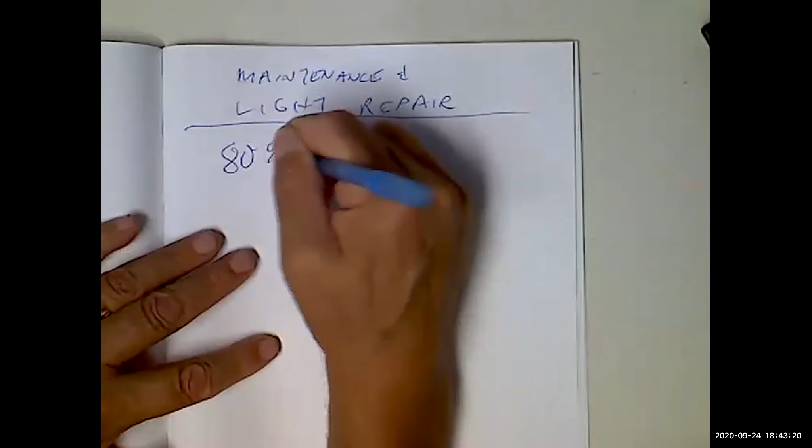Maintenance and light repair—the reason we're focusing on that is because it's 80% of entry level jobs, which primarily have to do with maintenance, keeping things running well, and light repair, changing belts and stuff like that. We're not going to be doing engine swaps, changing out cylinder heads, or putting in new intake valves. The stuff we're going to do is pretty low level, but it turns out low level is most of what needs to be done, and more importantly, it's the most important stuff that needs to be done.

For instance, you buy a used car. Okay, so now you've got a used car. It's a stranger to you. What do you do? Well, the most important thing to do is not buy a fancy stereo, not buy a fancy exhaust, not buy fancy wheels and tires. The most important thing to do is go through that car on a safety inspection.

We're going to put it up in the air. We're going to do an undercar inspection—that means we're going to look underneath it, see if we can find some kind of frame damage, some kind of structural damage. We're going to take the wheels off so we can do brake checks, suspension and steering checks. We're going to open up the hood and inspect the hoses, inspect the radiator cap, inspect the air filter housing—all kinds of stuff that could conceivably grenade this engine if you don't get it right the first time.

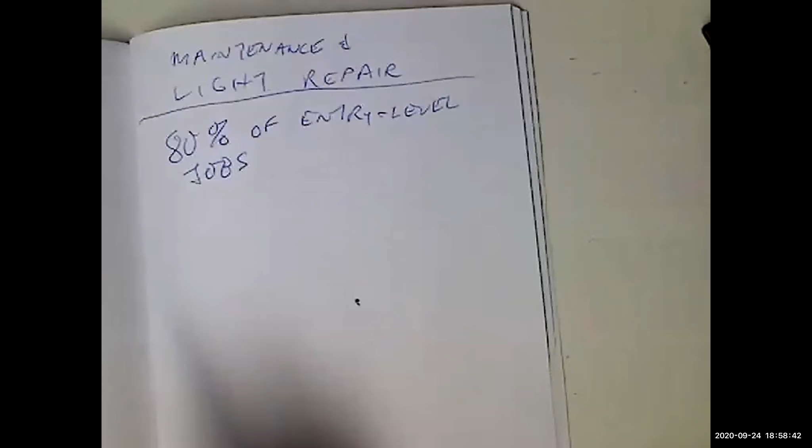Okay, so if you're going to use a scanner, that means you're going to have to learn how to use a scanner. So what do we do? We say, okay, I'm going to make myself a plan of action. I want to check the fluids, I want to check the belts, I want to check the hoses, I want to check the brakes, I want to check the suspension.

And then I can go to Chris Fix and say, okay, this is how you do this, this is how you do that. It's okay to learn how to check the battery when it's some generic battery, but if it's for your particular car, that's way better.

I gotta say, folks, it's true for most of you: nobody expects you to know anything, or not much anyway. But it's always better to know as much as you can, because that way you need less explained to you. The problem is, if the experts in the class are required to explain stuff to you that you could otherwise gather, that takes them off a job that may be really necessary.

Because a lot of times, we'll be in the middle of a process and something really terrible will break, and it's like, okay, there's only a couple of people in this room that can fix this.

And if it doesn't get fixed, either I'm staying there till midnight, which would suck, or this car stays here till next Thursday, which would suck even worse. Or I could maybe have my class fix it the next morning or something like that. There's lots of ways around it, but there's nothing as good as driving in and driving out.

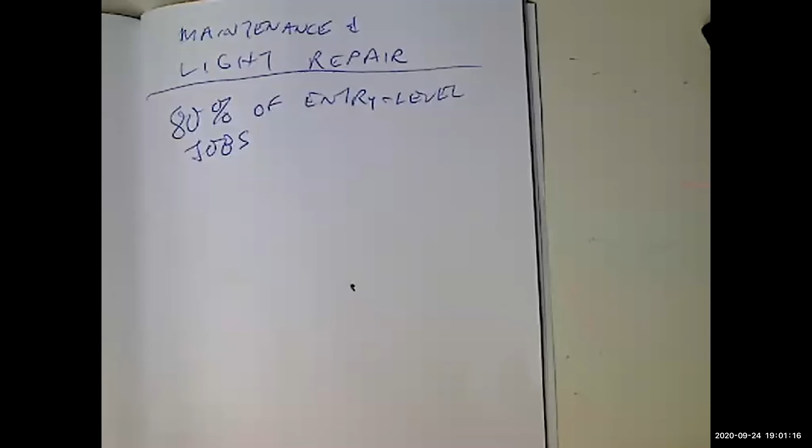Gabe, how's your resume looking? Why don't you send it to me? I'll look it over for you, yeah? Could make a big difference, because now's the time to be moving up. 8% quarterly growth. Gabe, tell me what IBEW says next week, because if you don't talk to IBEW this week, I'm not going to be happy with you. And I'm not talking about making a phone call. I'm talking about getting your little booty down there and talking to somebody, because if there's 8% growth, then the unions have got to be feeling it too. Go get some, dude. Get some.

Gabe, my question to you, and you don't have to answer this because it's kind of a private question, but do you have a retirement at the place where you work? The reason I bring this up is because many of these private companies wait until about a year before you're supposed to retire, and they just fire you, so they don't have to pay you retirement. I've seen that a dozen times. At least the union won't do that to you, hopefully, theoretically. Maybe I'm fooling myself. In fact, it looks like they may even be offering people like me golden handshakes. That's the rumor. That's the question.

Which is good because that'll give Chuck the opportunity to take my job. Chuck wants my job. Ever since I met Chuck Reyna, I knew he wanted to take my job.

You may get your chance, buddy. You may get your chance. You can't beat the pay, and well, you can probably beat the working conditions, but I do have air conditioning in the shop. Did I mention we have air conditioning in the shop? No extra charge. Or did I mention we have air conditioning in the shop and it's $20 a night? Yeah, we have air conditioning in the shop.

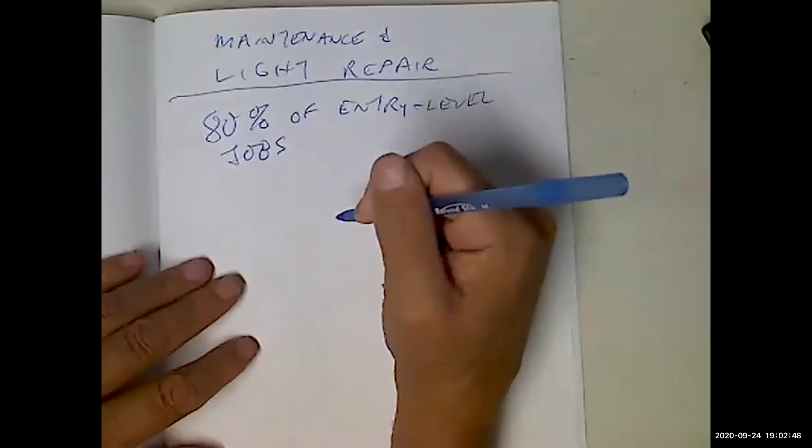Probably won't need it by the time we get there, but anyways, so maintenance and light repair. Light repair means we don't do major surgery, but we do brake jobs and such. We have done struts. It's ended badly a lot of times because that ends up being like a 3 or 4 hour job unless me, Chuck, or Rudy does it in general. Hopefully we'll find out about other people and what skills they have.

So just so you know, we aren't going to do engine rebuilds. We're not going to be changing head gaskets or anything like that, but we can do stuff - change light bulbs, change radiators, whatever. We can do a lot of stuff as long as you understand that you need to do your part before class begins.

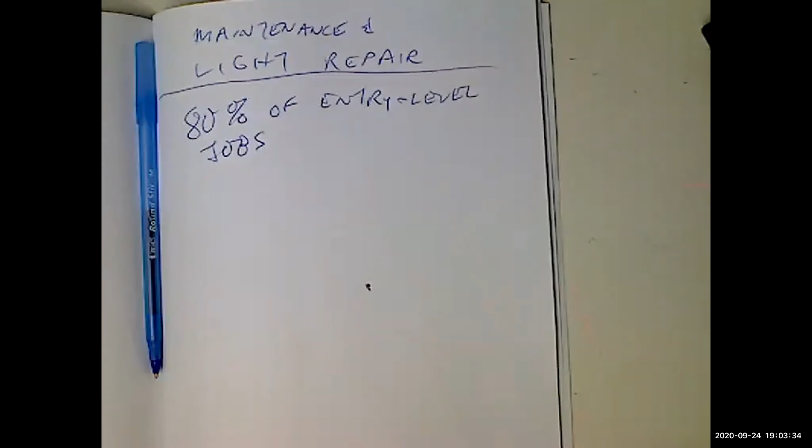Incidentally, I'm going to have an ROP right before this class that's going to go from 2:15 to 5:45. Now, technically, we're not supposed to let you in the gate before 6, which would suck because that means we couldn't even get started on any cars before 6. So in general, I like to get the gate open at about 5:30, so people can start trailing in. They are not going to enjoy the mingling of adults and children, so let's not overdo it or create an issue, but it's always better to have more time than less. It's always better to be done an hour early than 10 minutes late.

All kinds of stuff we're talking about today. All right, so what do we need to know?

Well, we can talk about fluids. Let's talk about fluids. Hard to talk about fluids without talking about the systems they work in. Well, let's talk about brakes. Might as well break the ice. Brakes gotta slow or stop the vehicle.

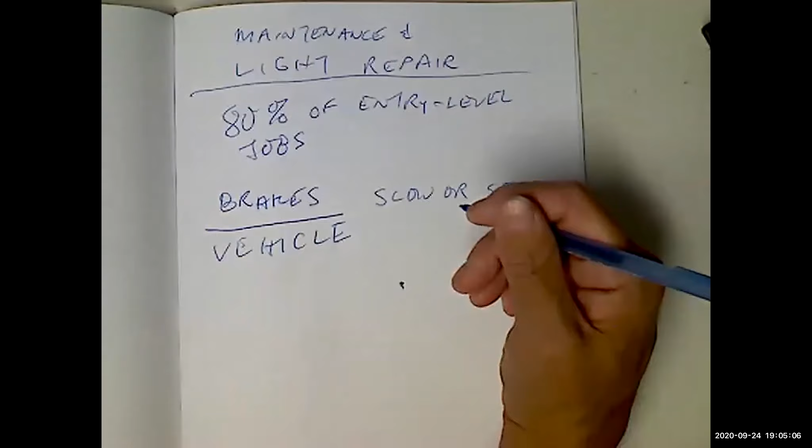And what chapter in the book is this going to be? I was just looking at it here. 15? Now, to answer your question, the book is not truly aligned with what we do in this class, but what we do in this class is kind of. It's page 181, I think. Chapter 15. Correct.

Okay, so the book is not truly aligned with what we're doing in this class, but what we're doing in this class is actually this book right here, except this is like a $110 book. And I thought that that would be prohibitive for most people, especially since they're not planning on becoming technicians. Now, if you were taking this class at Citrus or something like that, this would be the primo book.

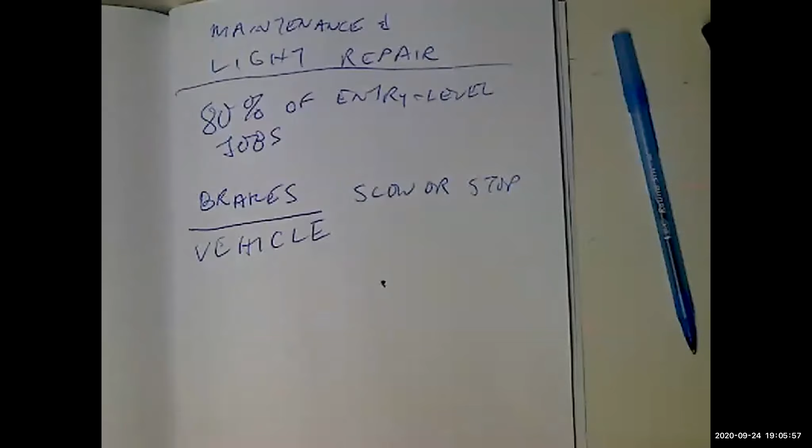It's kind of too hardcore for what we're trying to accomplish. So what I didn't want to do is box people out by having a textbook that was too expensive, because if we make the textbook too expensive, then people just won't buy any book. And I thought that auto upkeep was much better than no book, and probably for most people better than this. However, if you really want to learn this stuff, if you're really hardcore about it, you might want to consider buying this book or the other book.

Now, let me ask you a question. Does it matter if you get an old edition? No. In fact, I would suggest it because the old editions are going to be cheap. This is 2014. Unfortunately, this is a relatively new program, so you're going to have a hard time finding old versions of this book. But maybe you can find one with a damaged cover or something like that. I don't know. But let's go on.

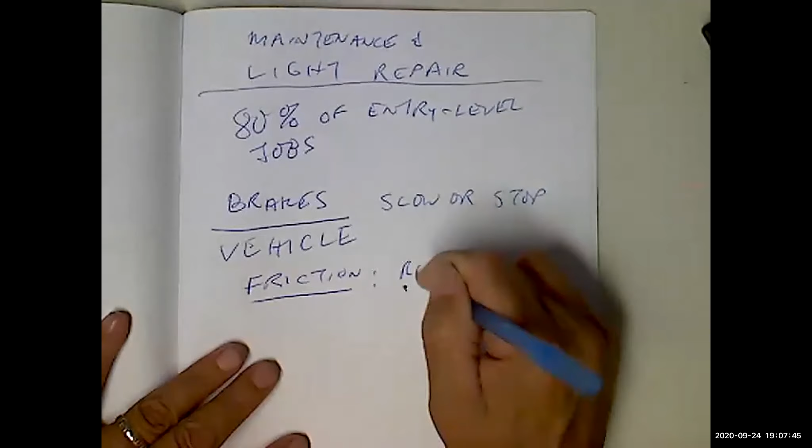All right, brakes are going to slow or stop the vehicle. How? They're going to do it by friction. And friction is defined as resistance of two things moving across each other.

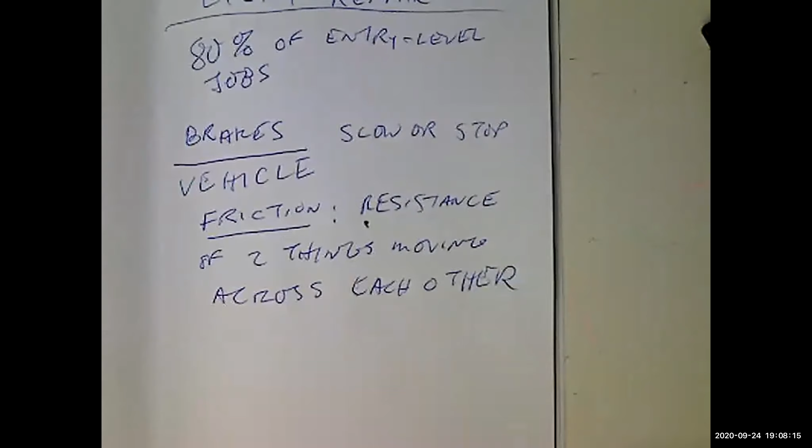So for instance, if you had ice moving across glass, that would be low friction. If you had skin moving across asphalt, that would be high friction. Well, the important part about that is friction creates heat. Yep, heat.

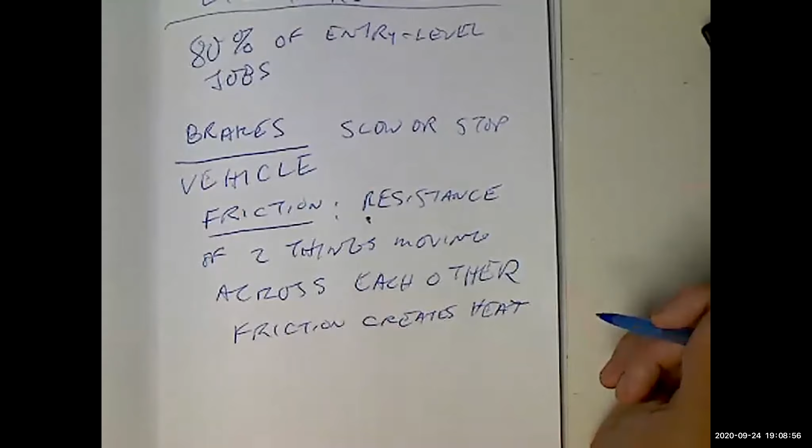And that's a big deal because heat is the enemy. Heat is the enemy in a whole lot of ways. And one of the ways is the fluid, right? Because if you get water in the brake fluid and it gets hot, guess what happens to it? It turns into steam. Now all of a sudden you lose your solid pedal. That's called spongy pedal when hot. And that's a sign that you got water in your brake fluid. Change your brake fluid. Usually you're not going to discover you have that problem until you really, really need it. Yeah, until you really, really wish you didn't have it.

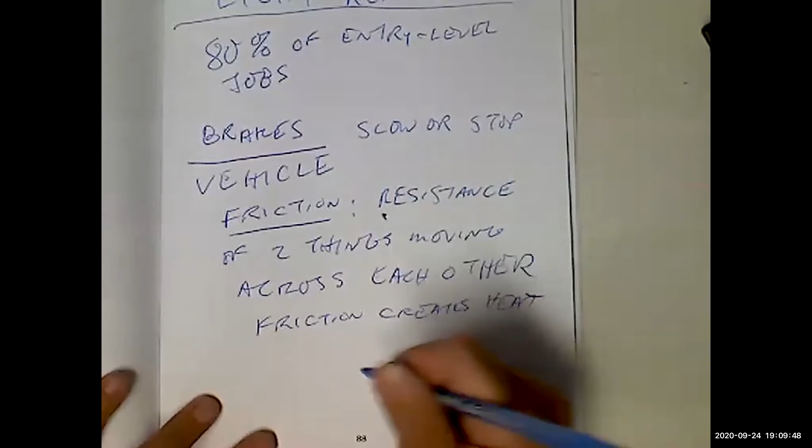So. Or you go over a hill. Yeah, exactly. I was going to the US Festival in 1983 when it was the only time I've ever experienced brake fade. My 65 Malibu. We're going to the US Festival in 1983 and I come down that hill in Devore and it's like I step on the brakes going around the corner and it's like, fellas. Hey, fellers. Put your feet up. Yeah, might as well tighten them seatbelts. US Festival. Yeah, there you go. Was that the first time? Oh, sorry. First time I went to the US Festival? No, was that the first US Festival? Yeah. The first US Festival. 83, 84? Yeah. Oh, you too? Man. You too? Yeah. Right? Yeah. And how would you know? I do. Your grandpa tell you about that? No, I've been into music for a long time, since I was a little kid.

Anyway, so the point I was trying to make was we're going to make friction, and we're going to make friction by using friction materials. And that's what we need to focus on this evening.

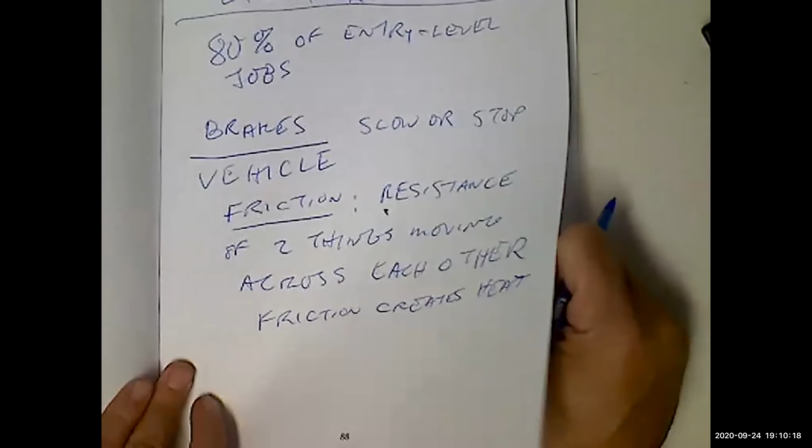There's two main types of brakes. That would be drum brakes and disc brakes. I'm going to teach you disc brakes just because it's kind of quick.

And I think what I'm going to do, well, let me get to that in a moment. So here's what I'm going to do. This is a top view, which means I'm looking down from the top at this. And, doggone it, I'm going to have this little thing here, going in this little thing here. Can't do it this way. Can't do it this way. It's too abstract, people aren't going to understand it. So let me do this, and I'll be right there.

Well, that's a caliper. That, and that's not what I need. What I need is...

There we go. Okay, this is the disc brake assembly, and it's called the disc brake assembly. Frenos de disco. It's called the disc brake assembly because this is called the brake disc, often called the rotor.

Now, the rotor spins. This setup has been used in aircraft since the 30s. The reason it works so well is because if the rotor gets wet, centrifugal force will throw the water off. Plus, the brake pads here will actually wipe the water off. See, if you get water inside drum brakes, it'll just get trapped inside the drum and you'll lose friction, which means it won't stop as well.

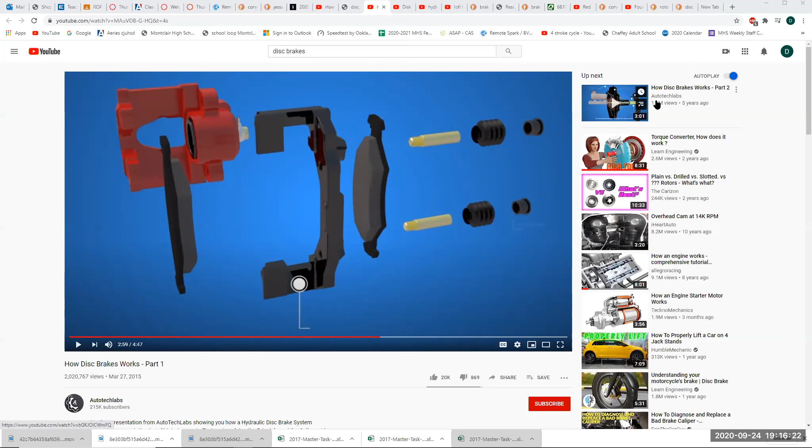Okay, so the name of this video is How Disc Brakes Work, Part 1. Part 2 is going to show you how the master cylinder works and how the power booster works. So this can be your homework.

But let me show you, because it's going to be impossible to explain if I don't show you at least something. Pascal's law says that in a closed container, pressure is the same everywhere and in all directions. That's the basic principle of hydraulics. That means we can create a pressure in a closed system at the master cylinder, and that pressure will be transmitted to each of the brakes.

I hope so badly that we have high school football. I can't even begin to tell you.

And there's a demonstration, right? We're pushing down on this liquid, and the pressure is going to be the same everywhere and in all directions.

Over here, keep it simple. We can see basically a syringe, and we can see that if we push down this plunger, the fluid will be forced to come over here, and it'll push this piston up. Well, this is like the master cylinder. This is like the caliper piston.

When we create pressure by stepping on the brake pedal, it's going to create fluid pressure that's transmitted to the calipers, which is going to push the piston this way, which is going to squeeze the brake material against the rotor and slow it down or stop it.

I will probably give you a better example really quick. But I just wanted to show you a bunch of mathematical formulas which we will find interesting, but I'm not going to do them.

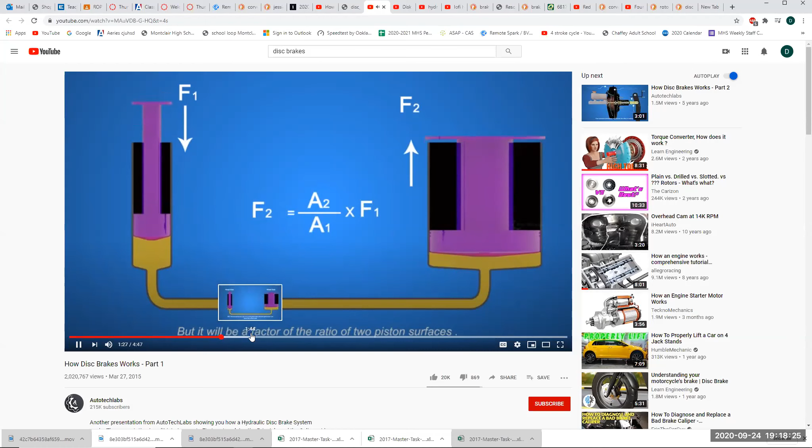This concludes seeing how this works. All I'm going to do is show you the general principle, and then I'm going to show you how it looks on the car.

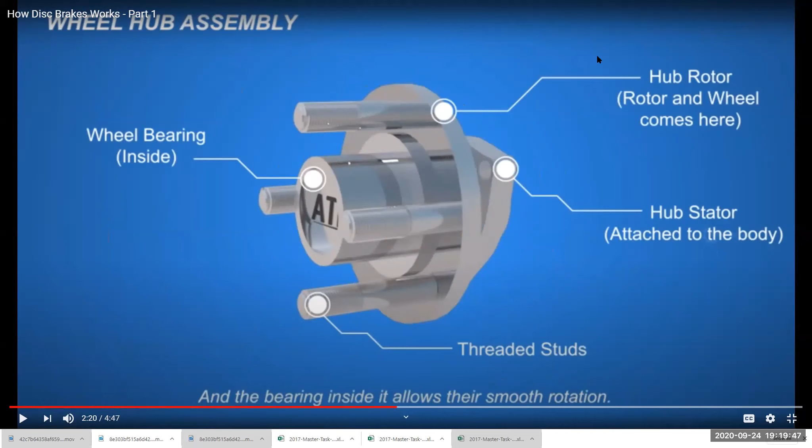The wheel hub assembly holds the wheel and the disc rotor, and the bearing inside it allows their smooth rotation. Every bearing allows a shaft to rotate in a housing, or something to rotate on a shaft.

The disc rotor is the part to which the brake pads squeeze against. This creates friction that retards the rotation of the wheel. The disc rotor produces a lot of heat due to this friction, and the drilled holes provide ventilation to remove this heat.

The brake caliper assembly uses the hydraulic force from the brake pedal to squeeze the brake pads to the rotor surfaces, thus creating friction and decelerating the wheel. That right there is the caliper, that's where the brake line attaches to. The black thing is the piston, which pushes out of the caliper and squeezes the brake pads against the rotor. And that's the brake pad here and the brake pad here.

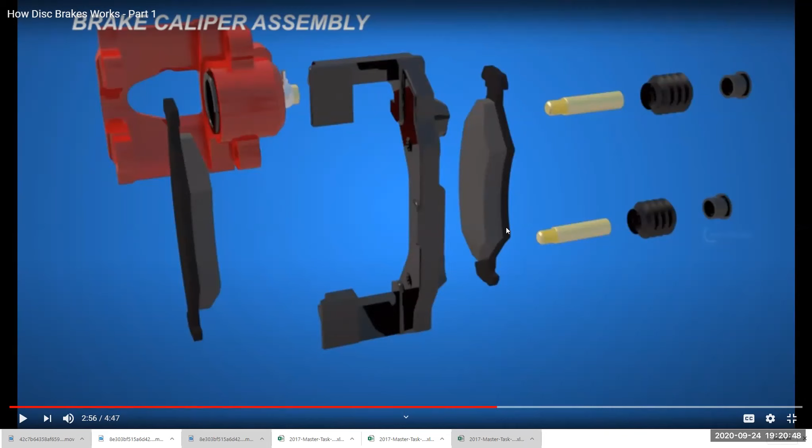As you can see, it's got the black steel backing plate and the gray brake linings, which does the actual friction work. The caliper assembly consists of the caliper bracket, slider pins, dust boots, inner brake pad, outer brake pad, caliper frame, and inside it, the piston.

The caliper frame has a banjo fitting through which the fluid reaches the piston. The pressurized fluid from the pedal's side is capable of pushing the piston with great force. Also, the caliper frame is free to slide along the slider pins within a fixed extent.

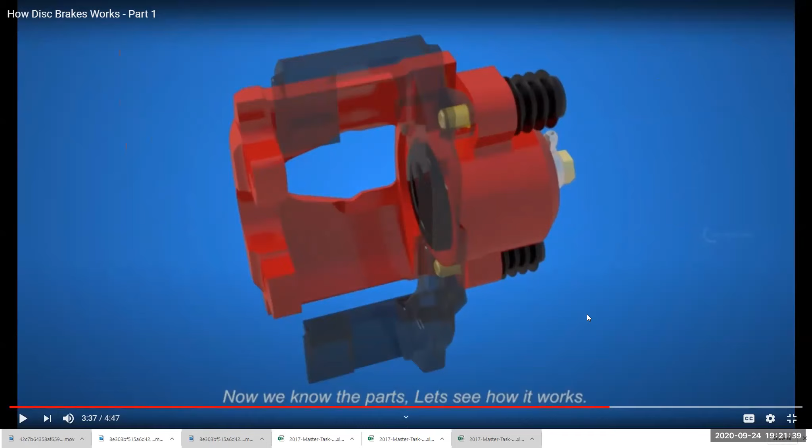Now we know that's the part that's bolted to the spindle, if you remember our lessons from earlier. Let's see how it works.

When you apply the brake, the caliper will receive the high-pressure hydraulic fluid from the brake master cylinder. The fluid will push the piston, which makes the inner brake pad squeeze against the disc rotor surface. As a result, the fluid's backward force will push the caliper frame along the slide pin, which makes the outer brake pad squeeze against the other side of the disc rotor.

Let's see one more time from the top view. This is the drawing I was just trying to make, but I figured you wouldn't understand it unless you saw this illustration. That's the rotor, and it's spinning. This right here is the caliper. Inside the caliper is the piston. There's the brake line right there.

Inner brake pad, friction material facing towards the rotor. Outer brake pad, friction material facing towards the rotor. Right here is the caliper, made of cast iron, sometimes aluminum, and it's got the piston inside. And then it's got these sliders, which allow it to move in order to clamp correctly.

Watch: the fluid pushes the piston, and the piston pushes the inner brake pad. Once the inner brake pad is pushed against the rotor, the fluid will push the caliper frame. The outer brake pad will now be pulled towards the other side of the disc rotor. This is how the disc brake system works on the wheel side.

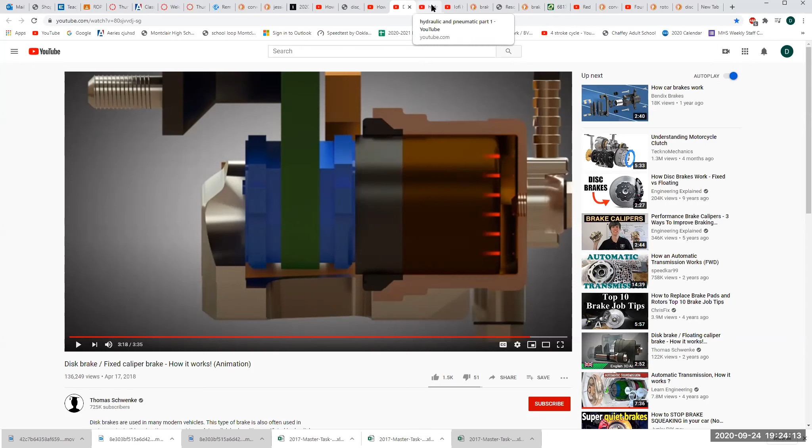Hydraulic and pneumatic, part one. Hydraulic means liquid, pneumatic means air, like pneumonia. For instance, on all the vehicles we work on, they're going to have hydraulic brakes. But when you start doing heavy equipment trucks, they're going to have air brakes. Same principles, just different applications.

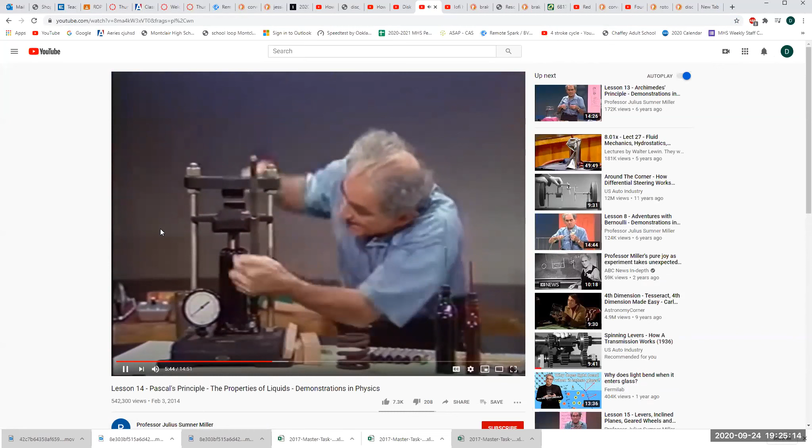He's not trying to act like a freak, he actually is this way. But you know what, he's cool, he likes the way he is. I mean, this is like my kind of people, right? He's an interesting guy, he likes the way he is. Most people would look at him and say, dude, you're a freak. But this guy is interesting. He made these videos like 60 years ago and people are still watching them. Professor Julius Sumner Miller—he's probably been dead 40 years, but you know what, if he likes himself, then... and here is a block of wood... most people don't. You can learn a lot from these videos, I'll tell you. He's an interesting guy, and he's come up with a bunch of interesting ways of explaining stuff. Maybe that could help you. You know, I think he's funny and cool.

So that's what I would suggest on that. I go to here, and then I come back here. So that's the videos I would like you to watch. I mean, we just don't have that luxury. I kind of feel like not making this drawing now because you've already seen the animation, and I don't think we're going to have time. Well, let me just skip that. Let me just burn that page then. The more I think about it, the less time we have. But...

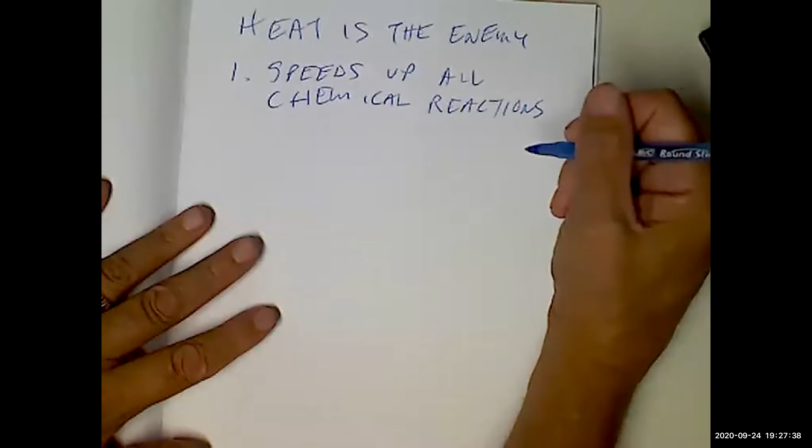You ever seen the picture of the face of those truck drivers that drive around with their window down? It's like this side of their face looks like they're 80 and this side shows that they're only 40. It's because heat increases the speed of all chemical reactions. That's why, for instance, that's why we wash our hands in warm water.

I mean, your bread would eventually rise, but if you put it in the oven, it's going to rise a lot faster.

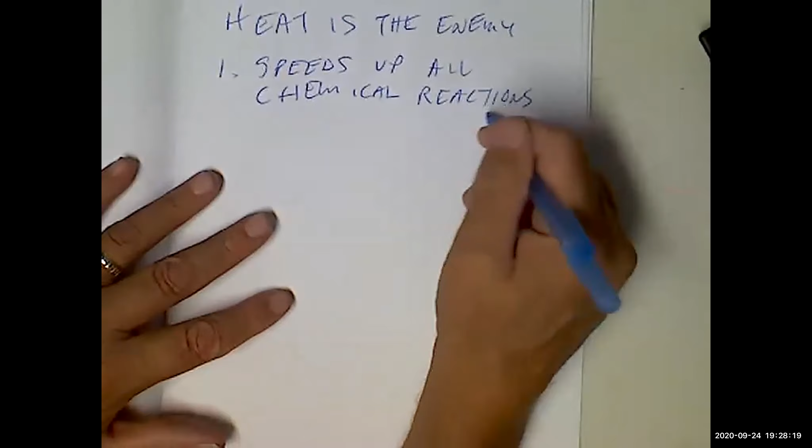Anyways, the point I was trying to make was it speeds up all chemical reactions, including oxidation reactions like corrosion and rust.

If you increase the temperature of iron and water, it will increase rust. Brakes get hot because of friction, and we've got a whole bunch of things to deal with when it comes to getting rid of this heat. It's going to increase the speed of breakdown of lubricants.

So if your engine runs hotter, you're going to have to change your oil more frequently. If your engine gets hotter, your coolant's going to break down more quickly. If your battery gets hotter, your electrolyte's going to break down more quickly, and so are your battery plates. Heat is the freaking enemy, and as a result, we've got to worry about that. It speeds up all chemical reactions. That's one big problem we have. For instance, it's going to make all the rubber die, because the two main enemies of rubber are heat and oil.

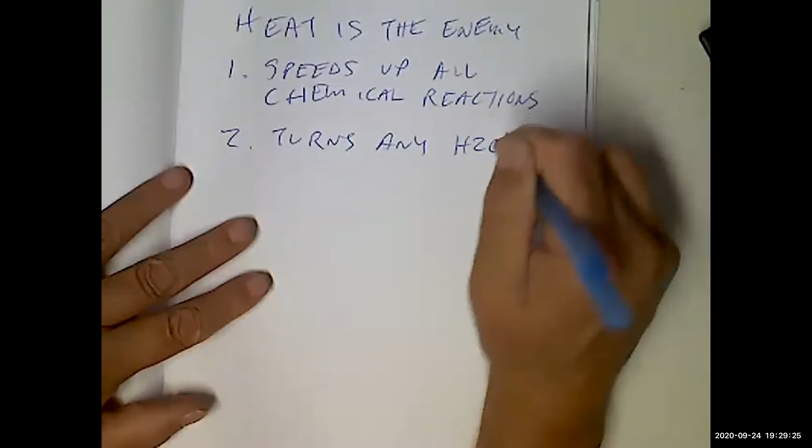Number two, heat turns any H2O, which is a liquid water when it's cold, into a gas, I'm sorry, into steam. Which means if we have any water in our brake fluid, it's going to turn into a gas. And when it turns into a gas, we have no more hard pedal.

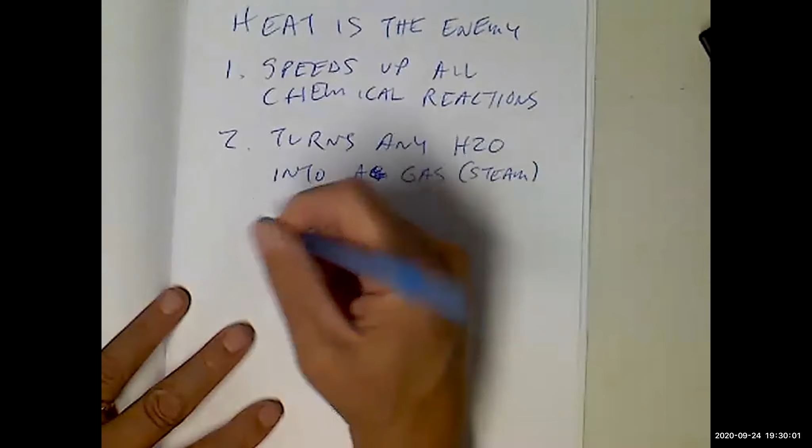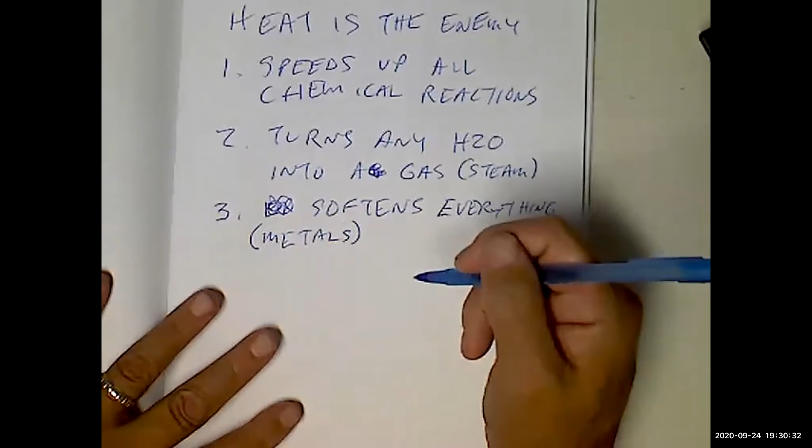So heat is the big enemy. It's a management thing. It softens everything. In this case, we're mostly concerned with metals - they're soft, so they're not that strong. It's like butter: you get it hotter, it turns into a liquid. Everything liquefies.

All right, so as a result, heat management is the key. That's why, when we see drilled rotors, we're trying to get all that airflow. If you look at Corvettes and stuff like that, you'll notice they actually have functional brake ducts, which are continuously blowing air on the calipers and rotors, trying to keep them cool, because you don't want brakes to overheat. If you watch that movie Ford versus Ferrari, you saw that was a major part of the plot.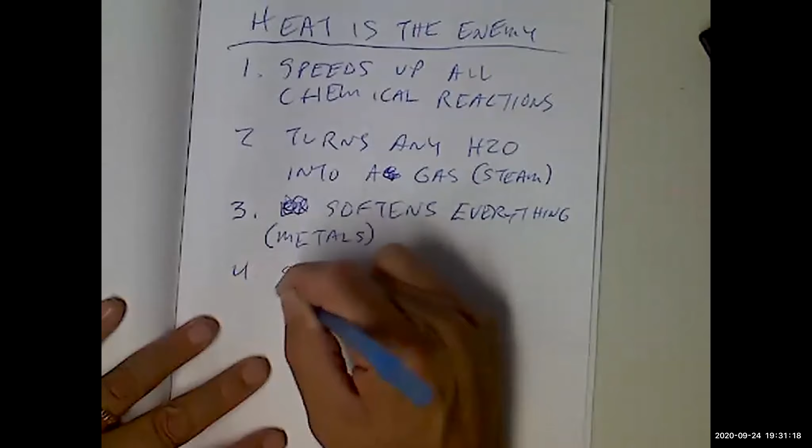And of course, speeds, fluid, and lubrication breakdown. Which is why when you're bleeding brakes, you're always going to find out that the dirtiest, rustiest brake fluid is always right next to the brake pads, because that's where it's the hottest.

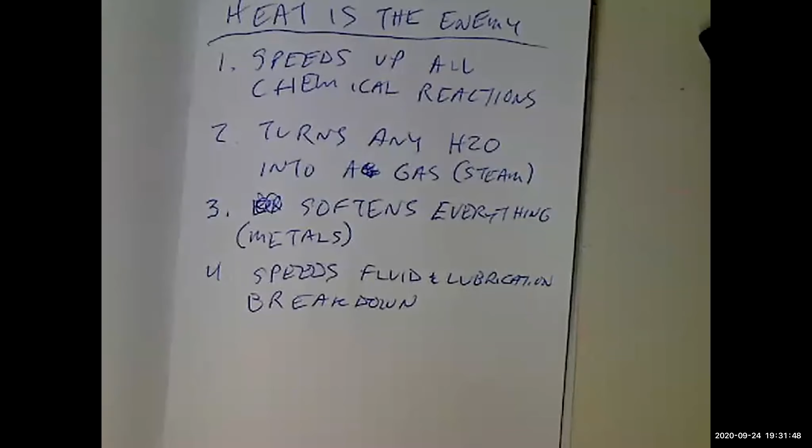In fact, when you have disc brakes on the front, you have to use special wheel bearing grease so it doesn't just liquefy - front disc wheel bearing grease. You have to use a special formulation of grease, otherwise it just liquefies. Incidentally, while we're on this topic, just as an aside, you don't want to mix different types of grease because they tend to liquefy. So if you're going to add grease or something like that, you really need to clean out all the old stuff and then put in fresh, which is a drag because it's like a million times more work, but it's true.

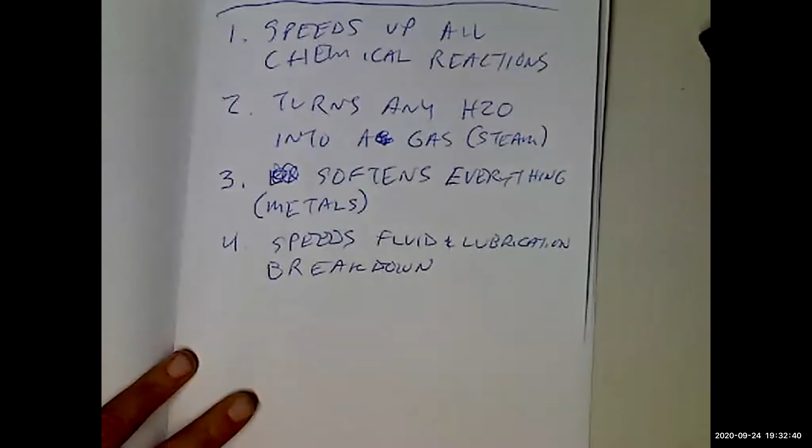Radcliffe, I have a question. Yeah, please. So I actually just scanned my car today, and it popped this one up, which is something we're actually talking about. I can't see it, let me shut down and move some stuff. I'm still learning how to use Zoom.

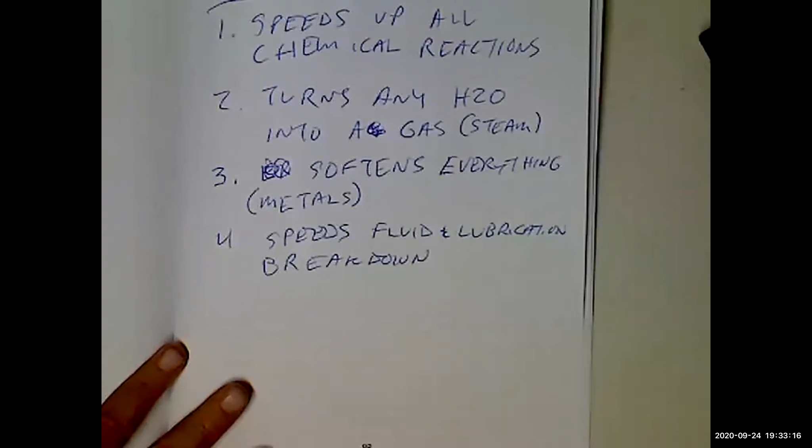What number is that? It's B0013. It was one of the brake things you were talking about. B0013, yes. Can I see the description again, please? It says passenger knee bolster deployment control, subfault, unsafe to drive. That's an airbag? Knee bolster? What in the world?

I'm not too sure. Did you look it up on the internet? I did actually, and it said something about my brakes. All right, well, okay, we got 12 minutes. Let's look.

You said B0013? Yeah. Driver frontal deployment loop stage 2. What in the world? What kind of car is that? It's a Ford Escort, a ZX2, 2003. Did you just buy this car? I did, the beginning of the year, around February. So I've had it for about a good minute by now.

Okay, did you go to Mitchell Pro Demand and look to see if this is a recall? I did not. Okay, it says right front passenger frontal deployment loop circuit. Well, that's helpful. Is this a salvage title? No, it's not, it's only ever had one owner, he bought it off the lot. He was in his 80s, said he couldn't drive anymore, so he sold it to me. So you didn't look it up on Pro Demand? I did not.

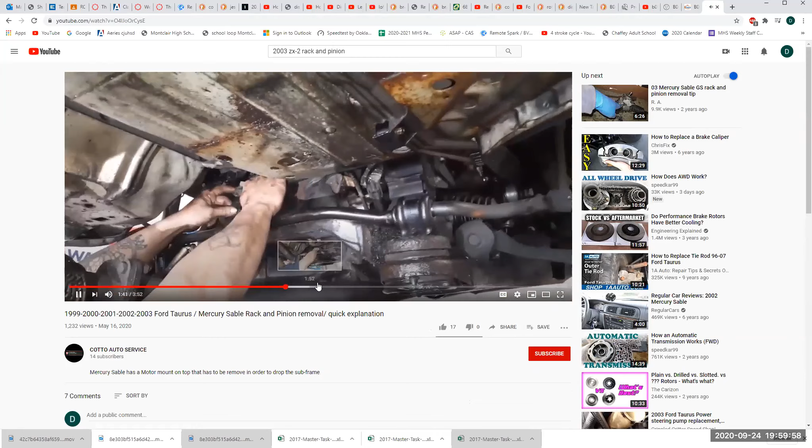Searching online: get your transmission jack or something. The rack and pinion is going to be up here. You got 2 screws, okay. You got to take off all your sensors - you got like 3 plugs, 3 sensors, 3 over here, 1 over here. So it's actually 4. This is the O2.

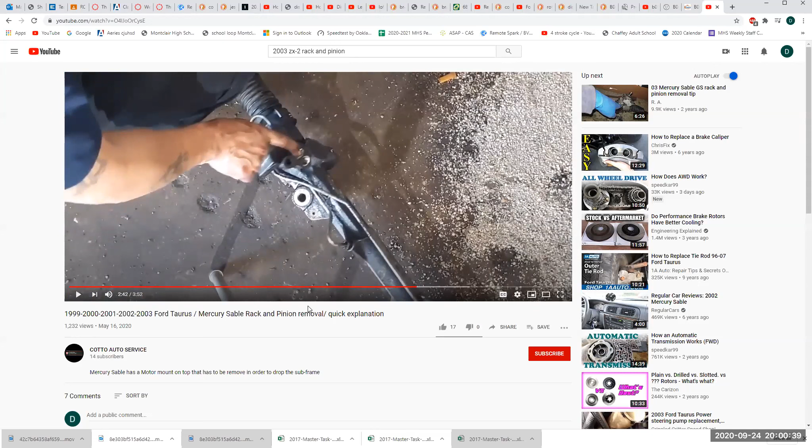Now if you put this rack and pinion in, the steering wheel is not level, or the rack and pinion is not right in the middle of its travel, could be a problem. The whole thing just came down with no issue. As you can see, you got all the clearance, all the space, everything in the world. You got to work with 1 hose, the left one, which is the main first stuff.

Yeah, he's got all this copyrighted information. Anyways, the point I was trying to make was, I think this is way past our pay grade. Although I do see - I don't know if this Mercury Sable is the same thing, but I'll bet you it isn't because the ZX2 is kind of a high performance version. So the fact that when I look around, I don't see any service information on how to do this, and I also don't see any people making videos about it.

Oh, you know what we could do is we can come here to Pro Demand and let's just go rack and pinion.

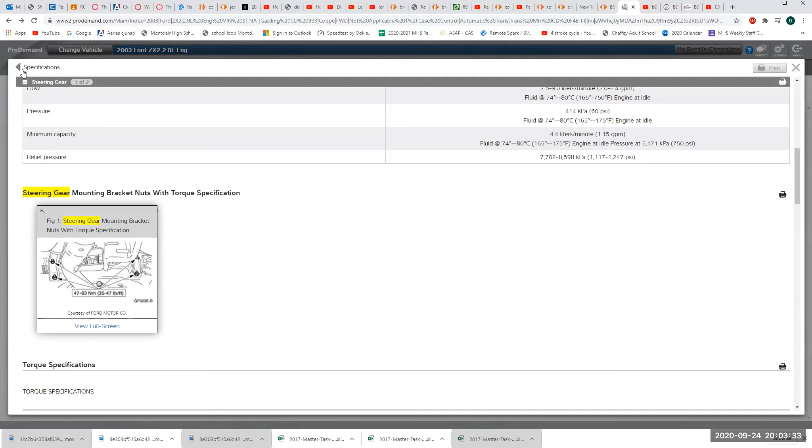That's not going to tell us anything. All right, unfortunately, I don't think we can spend too much more time on this. Torque specifications. Well, it doesn't show anything horrifying yet. Replace.

Fixes, component operation, OEM testing, top repairs. Replace steering gear, that's the top repair. Real fixes, clunky noise heard. Yeah, I don't know, I don't think we can spend too much more time on this.

But that's the problem, because if you take it to an underqualified technician, they're just going to run you around the rosy. Yeah, shoot. Component operation, then we're done right there. Nah, nothing. Shoot. Okay, all right, sorry about that. Let's get back at this.

Like I said, what I would do is, okay, the airbag thing, I think they disconnected a sensor and didn't reconnect it, I suspect. Because when I look at this right there, oh, shoot, sorry. I did email you the other codes that popped up from Pep Boys. Okay, alright, yeah, because my code reader was the one that popped up with the weird B0013. So then I took it to Pep Boys today before the class, and they scanned it, and I sent you over a picture of their scanner.

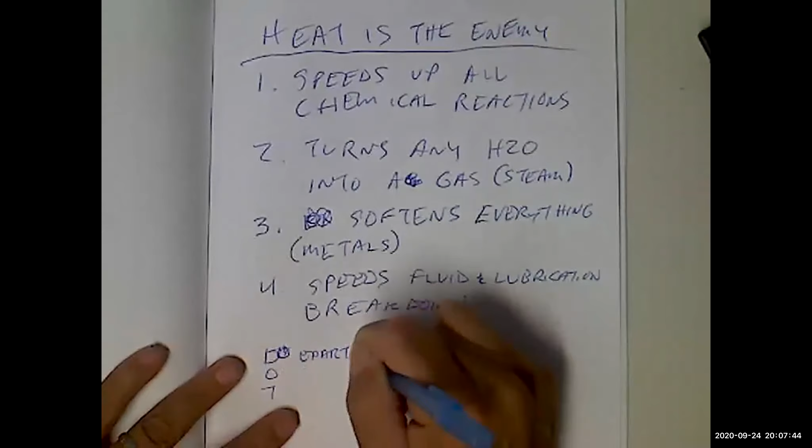DOT stands for Department of Transportation. And they are the ones that set standards for tires and also for fluids, brake fluids. That's why you're going to notice every tire has a DOT number on it.

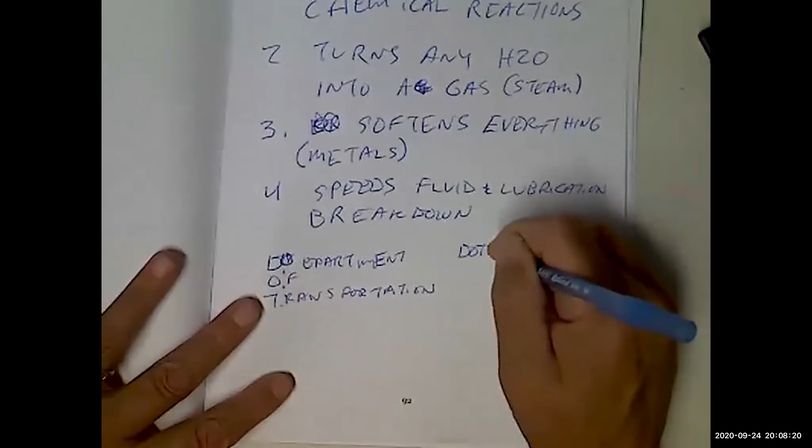And the reason we worry about this is because we have different types of brake fluid. DOT 2, you're never going to see that anymore. So why don't we just start with DOT 3, DOT 4 you're never going to see, well you might, and then DOT 5. DOT 3 was for disc and drum combination, and you can use it if you just have all drums. But that's alcohol based, which means it's going to attract water, which is what's going to cause all your problems.

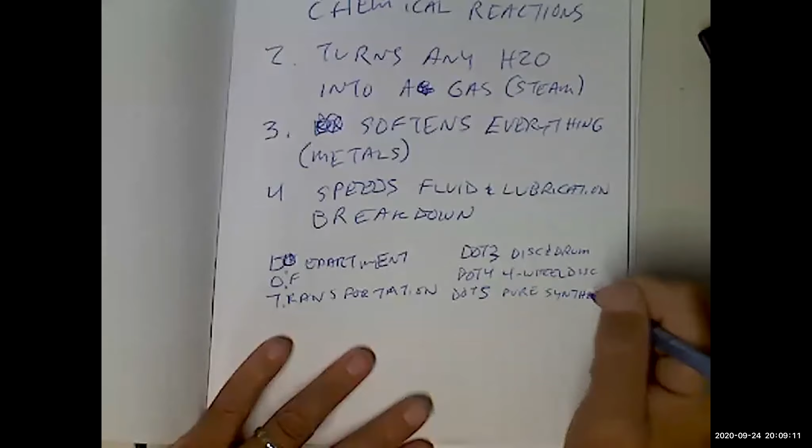And this is what causes your dark brown brake fluid on your older cars. DOT 4 was four-wheel disc, you don't usually see that because people were continuously putting the wrong fluid in their cars. And then DOT 5 was pure synthetic, and that's what they put in the expensive Porsche 911s and stuff like that. This tended to be pink.

But new DOT 3, which is probably 99% of all the brake fluid they make, is light gold and clear.

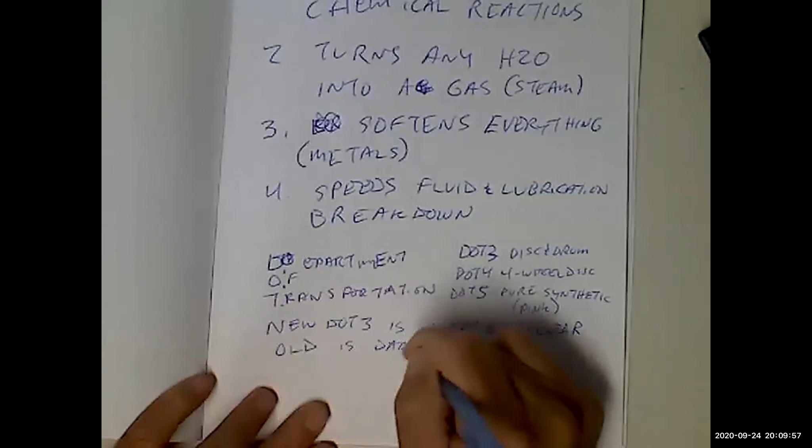So what's going to happen is when you open up your hood and look at your master brake cylinder, you're going to see how freaking old and dirty your brake fluid is. Old is dark brown. Because that's rust.

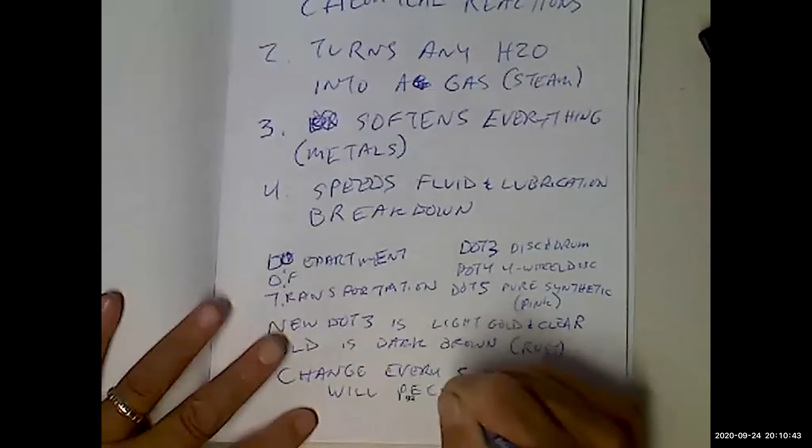Also, it will peel paint. I had a student at Citrus College who was working at a Jaguar dealership, and she was doing something with the brakes, bleeding them or something. She got brake fluid on a brand new Jaguar fender, and they had to replace the whole fender. It was almost $1,000. Although it seems like it would be a lot more than that. I don't know, but whatever the case, this was 20 years ago too. Anyways, this stuff will peel paint, so don't ever even think about getting it on anything that matters. We got to be really careful about brake fluid management because it's like acid. It will eat through stuff like crazy.

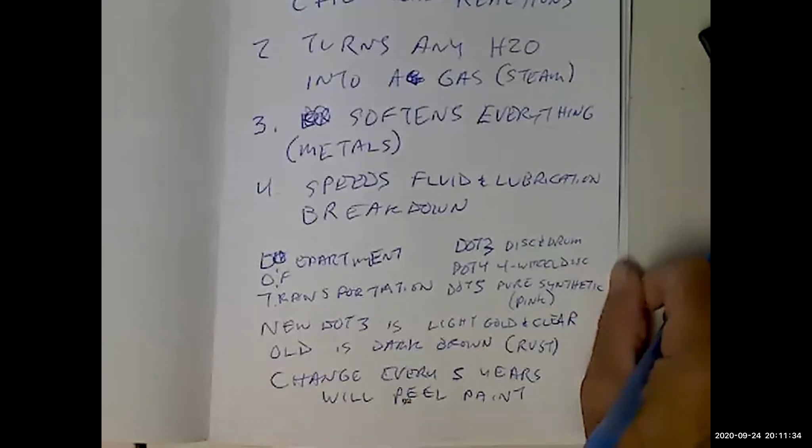Now, since it's alcohol based, you can pour it down the drain legally and safely, because it's just like pouring a beer down the drain, basically. Not like antifreeze—antifreeze you cannot pour down the drain, but brake fluid you can. So that's the preferred method of disposal too.

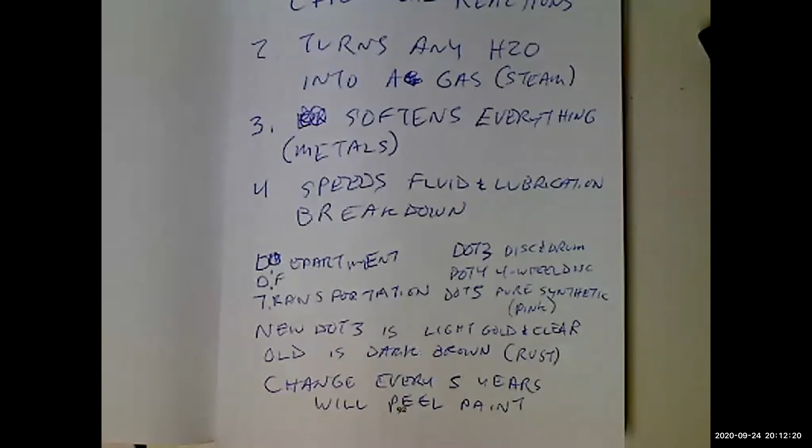You know, it's a 3-piece set. You don't have to buy all three, but it's a good idea. Amazon, maybe, I'm not sure—I only looked on eBay and they didn't have them. Let me look. Those will be great because he has a set of 3, and I had an '84 Nissan where Rudy took off one of the lines where the bolt or the nut was stripped, and with his pliers we were able to take it off.

Vice grip, strip—it's the Irwin brand. Right, you have a 3-pack that I need for my... yeah, it's right here, bud. For sure, yep, that's the one. And they have a 5-inch, a 10-inch, and a 7-inch. I recommend those, everybody. Ooh, that's a miracle. When you need them, you need them.

And for my dirt bike, my drain plug messed up, for instance. But you got to get—there's 3 different sizes, so for small stuff and big stuff you got to have different sizes. Otherwise, I'm going to buy the 3-pack. Yep, I got the money. That'll save you every once in a while.

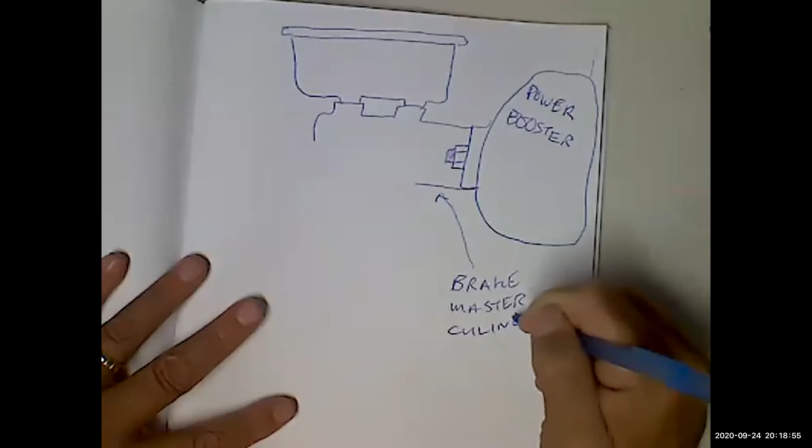This thing right here has this part, and then it's going to have a nut right there. I don't think I've ever made this drawing before, but I might have. Yeah, that's pretty good. This thing right here is going to be called the brake master cylinder. So write down everything I write down, draw everything I draw - that's going to be the key to your happiness. So that's the brake master cylinder, and what it does is controls the brakes at all the wheels. That's why they call it the master.

Now, this thing right there is called the reservoir, and that's where we keep the brake fluid. And what's it going to say on the side? Full and, no, min and max.

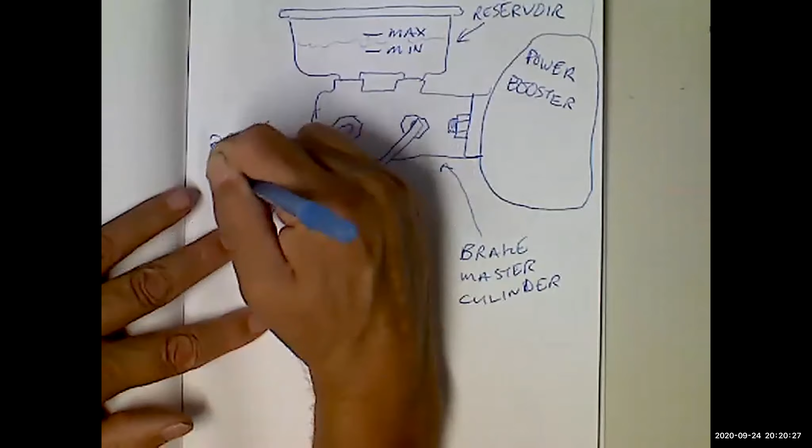And then it's going to come in like that, whatever - something like that. Now, this is going to come this way, go somewhere. And then this is going to come this way, going somewhere. That's going to go that way, that way, that way. There we go. That's going to be a brake line. Good job, did my best.

And then usually this is going to go into the ABS unit. ABS - anti-lock brake system unit. There we go. Usually on any modern car.

This is going to be in front of where the driver sits, usually. You're going to see this big can that's about 10 inches in diameter and about 3 inches deep, with a big rubber vacuum hose going to it. This is usually going to be made of aluminum, about 1.5 inches in diameter.

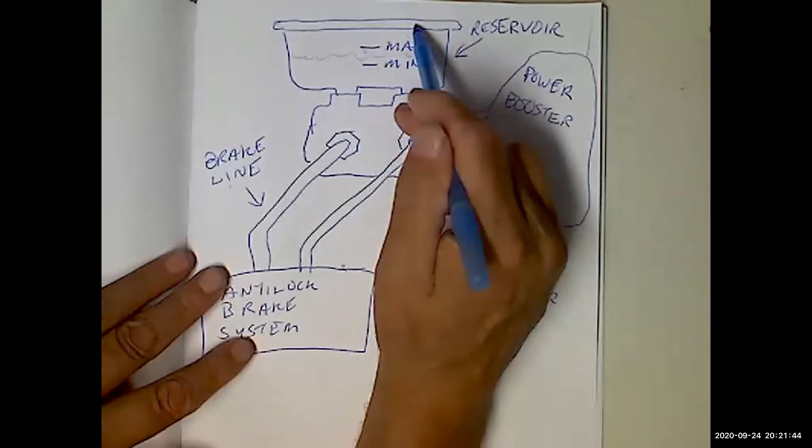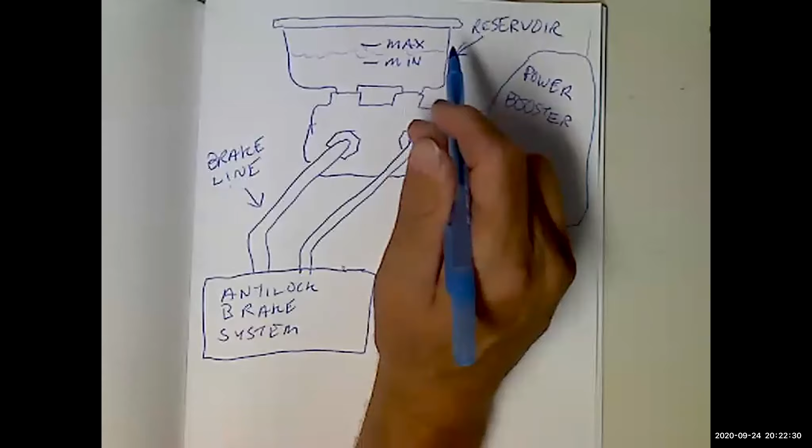Whatever the cap is, you need to make sure that it's on tight and correct, because brake fluid is hygroscopic, meaning it attracts water. So if this isn't sealed correctly, the seal has to be in good shape, or it's going to suck moisture out of the air and ruin your brake fluid. Now, on this cap, either way, it's going to say what type of brake fluid you're supposed to use. Usually it's going to be DOT 3, but it's going to tell you what type to use. Don't use the wrong type, because brakes are important.

What does the ABS brake system do? The ABS brake system is there so that if any of your tires lock up and you lose traction, it will release the brakes and stop you from skidding, restoring some level of control of your vehicle. It's a computerized system, and we'll talk about it later, but for now that's pretty much what you need to know.

And then the brake fluid can go to whatever kind of valving you need, whether it's a combination valve, a proportioning valve, or a metering valve. But eventually it's going to come out.

Well, I'm going to go this way, I think. Hi, Michelle. I see you got back home safe. Yeah, that's good, isn't it? What's up with you, Rudy? Just trying to pack up, brother. Really? It's really going to happen? No, trying to.

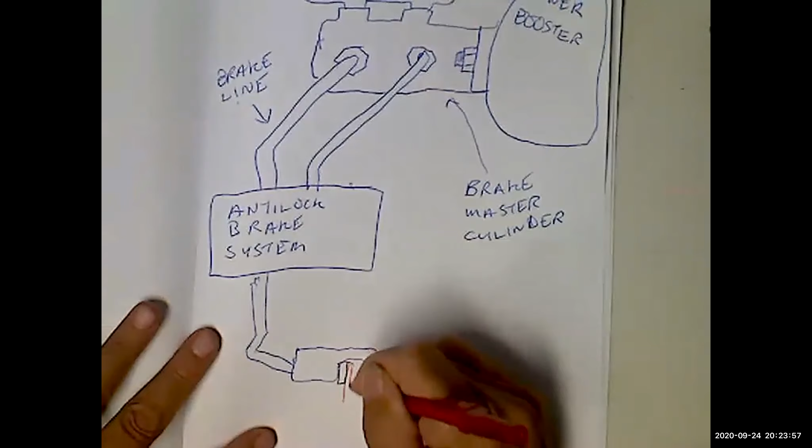Well, this is the drawing that I started last time, in case you're wondering what I'm doing. This red part is the rotor. The black things are the brake pads. And the blue thing that's shaped like a C is the caliper. Right on top of the caliper, there's going to be this valve, called the bleeder screw or the bleeder valve.

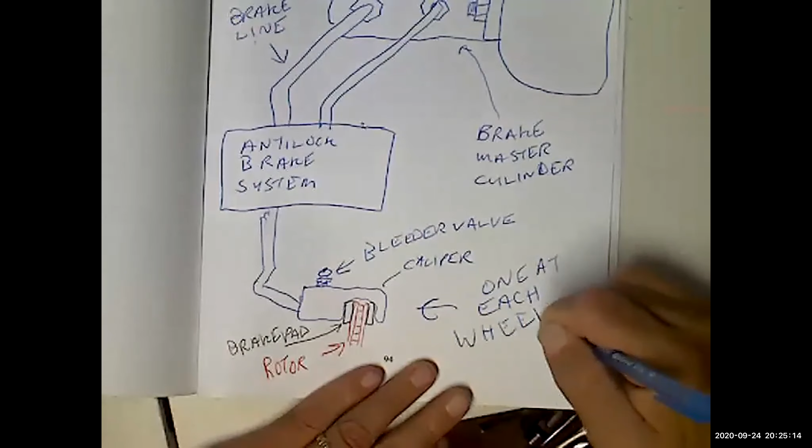And then I'm just going to put an arrow there, and say one at each wheel, especially if it's got 4-wheel disc. Yeah, so we're just going to assume it's got 4-wheel disc.

Hey, Rudy, 2003 ZX2, changed the rack and pinion on it, and now it's got a B0013 frontal airbag deployment loop code. Something tells me something just didn't get connected, or it might have got knocked off or something. That's what it sounds like. Yeah, because usually that wouldn't cause an issue with changing the rack. Unless it's that stupid one that has the airbag sensor in the rack. That's the one. You hit it, because there is one of those models, I don't remember exactly what year, but one of them had an airbag sensor in the rack and pinion itself. And what it would do is, in the case of an airbag deployment, it would basically lock the rack and pinion in place.

Is that the symptom you were having though? The steering wouldn't work? No. From when it first happened, what made me change my rack and pinion was I went to make a left turn and my steering was really stiff. So I took it into a mechanic out here in Rancho Cucamonga, called All Star Mechanics, and he tested it, said my power steering pressure was low. He said I needed to change out my power steering pump, which is why my steering was really stiff. But if that didn't work, could that have been it? Sounds about right. Was it stiff in both directions? Yeah, super stiff in both directions.

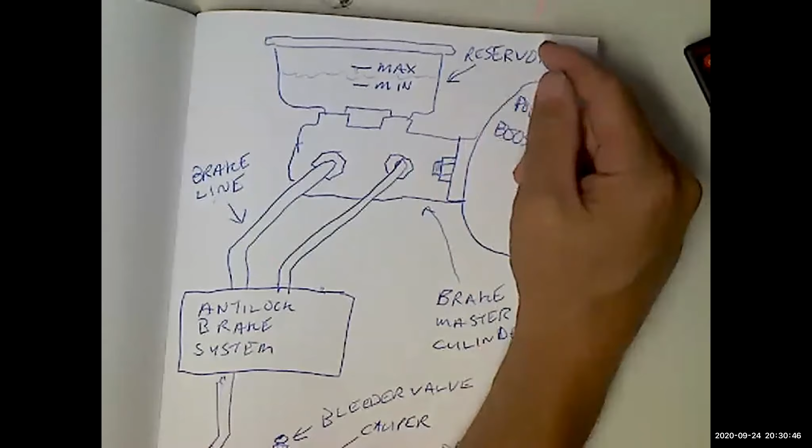So my theory is wait until you've got the pads changed and good meat on the pads before you come up with your final fluid levels. And I don't top off the fluids on the brake fluid. I set it when the pads are new and then forget it, and it gives me a useful indicator of how worn out the pads are. So you got that?

Now let us talk about something really important. Like finally.

So Rudy, it looks like we might be coming back like first week of November is my prediction. Woohoo! Yep.

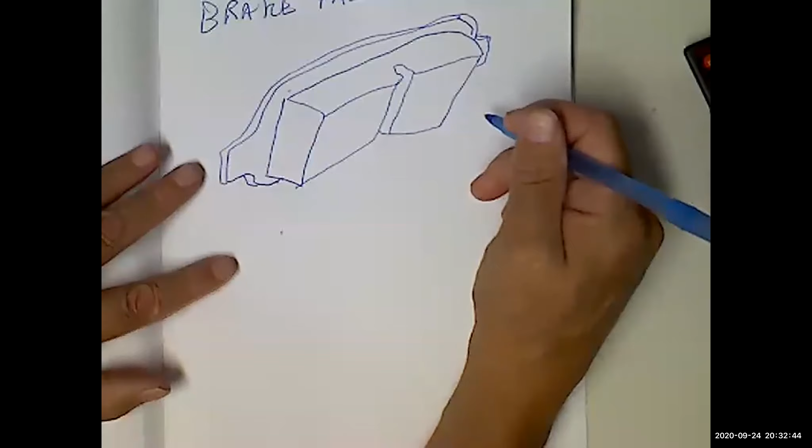It's easy for me to get to class, it's hard for me to get on these meetings. Yeah, aren't you sick of this? I realized I've done nothing but talk to the camera for 6 months. I was in church last night, and the pastor's like, 'I've had to make all my lessons on the camera, it's been terrible, I've had to spend 2 hours a week talking to a camera with nobody there.' I'm like, yeah, welcome to my world, buddy, I've served my time in hell. Yours is only 2 hours a week, mine's 6 hours a day, like 43 hours a week for me.

So anyways, this is a brake pad. Did you know there's a song named Rockliffe now?

Michelle, you here? Oh, just not. Okay, so anyway, that's a brake pad. Just got her mic on mute.

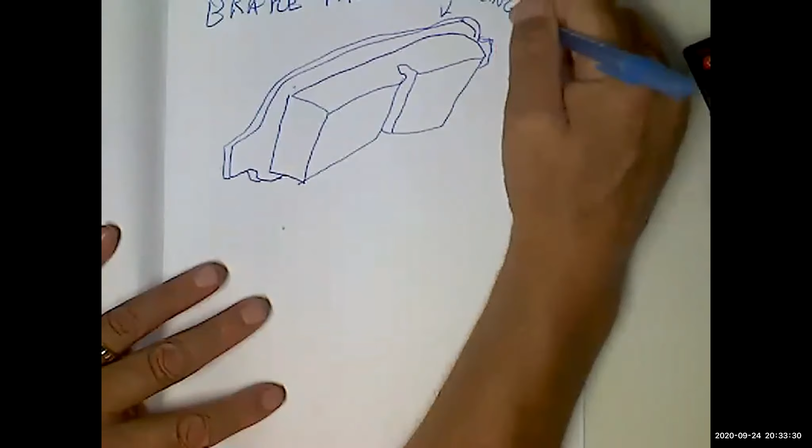Yeah, she is here. Okay, Michelle Norman. Go to YouTube, look up a song called Rockliffe by Brandon Hart. I just discovered it, it just came out. It's about one of my cousins, of course. There aren't that many Rockliffes. Anyways...

This right here is the friction material, the brake lining. And that's the actual part that rubs against the rotor to make it slow down and stop. The backing plate is made of steel because we need it to be strong.

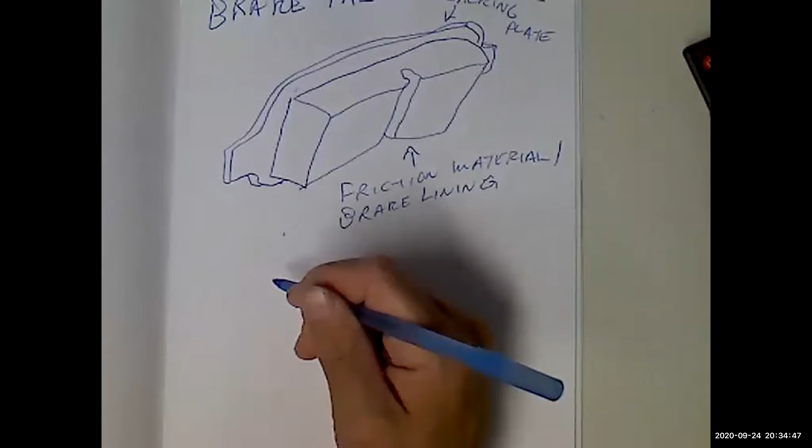And there are 3 main types of... didn't we already do this? Sounds familiar, because I remember Rudy disagreeing with me. Did we already do this? I don't think we did this last semester.

Really? Okay, 3 major types of linings: organic, semi-metallic, and ceramic. Yeah, you might be right, I think we did a sidebar on it. Oh okay, alright, well then why don't you teach it then?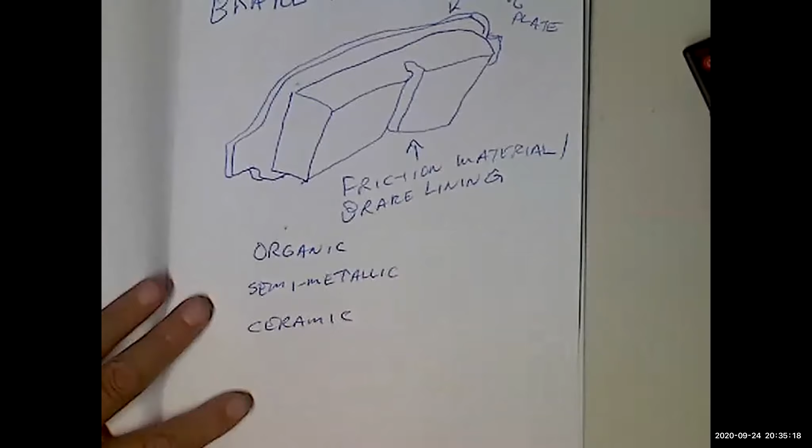We'll have a recitation. Back when I was your age, this is how we used to do school. The teacher would say, 'Okay Mr. Burks, would you like to explain to us what an organic brake pad material is?' Chuck remembers. This is back in the old days, this is how they used to run school. They'd say, 'Alright Mr. Reyna, would you like to explain to us how a semi-metallic pad is made?' And you'd either be sweating or you'd be making it. Those of us that made it gained so much confidence from this method that we went and accomplished great things because it gave us this big confidence boost. Now it's considered child abuse to ask a student a question by their direct name. So as a result, we don't build that confidence in school, and as a result they're bad speakers. Well, it used to be possible to be an intellectual bully, which is to say when I knew the answer, I would just come out and just roast. It's like, oh yeah, would you like to hear more information about this thing that you asked that nobody else in class knows anything about? But that was considered abusive for the students that didn't study or didn't learn, or maybe they were dumb or something. So of course now they're going back to it. It's like every 20 years the pendulum goes like this, and now everything that was bad teaching 20 years ago is now state of the art. It's crazy, I work in crazy town.

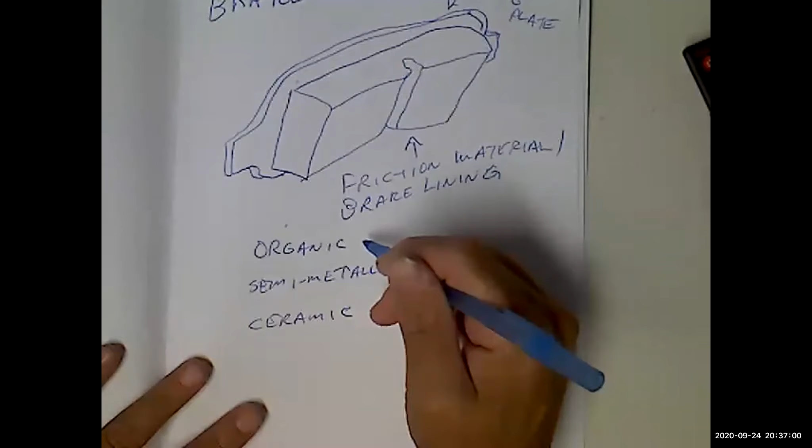Alright, organic. That means it's made of moose licks - that was a joke. Okay, organic means it's made of tree bark. This is the friction material, folks. We're trying to get good brake performance, which means we're trying to deal with noise, performance, and durability. We just went through like an hour of heat and durability.

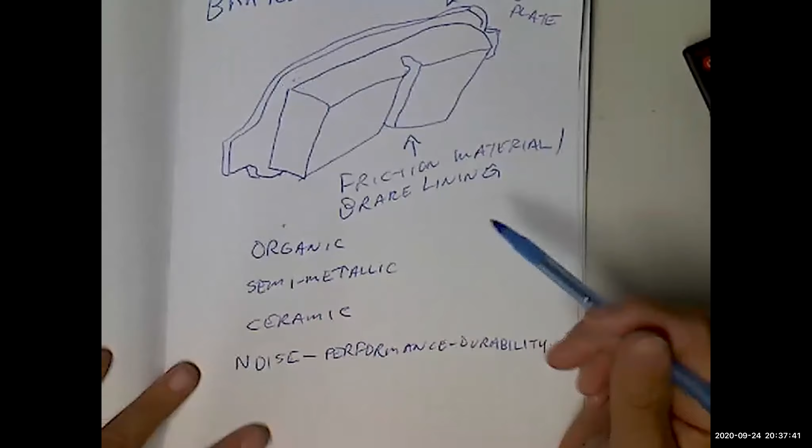So here's the problem with organic materials. Back in the old days we used to use asbestos. Back when we used to land people on the moon without a computer, we used to use asbestos because it's a flame retardant material. But then we found out asbestos caused cancer, so we just bought our brake stuff from Canada where they didn't have that law - that's actually true. Because without asbestos, it was just crap. So organic brake linings are made of tree bark, basically, and the problem is they make a lot of noise, they don't perform very well, and they only last a couple of months.

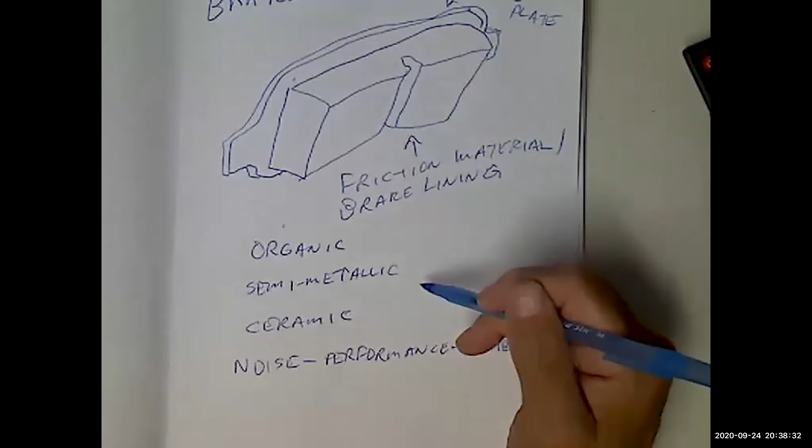Now, what's better is semi-metallic linings, because what we do is take powdered metal, grind up little bits of soft metal like bronze, glue it all up into a pad, and stick it on the back of a backing plate. We call those semi-metallic because they've got little bits of metal in it. As a result the performance is way better, giving you less noise, better performance, better durability. But the problem is they will always squeak when cold.

What does it take to warm up a brake pad? Step on the brakes a couple of times and it'll warm it up. So if you have brakes that squeak the first couple of times you use them in the morning, and then the noise goes away, you probably have semi-metallic linings. There's nothing you can do about it. You might as well get used to it.

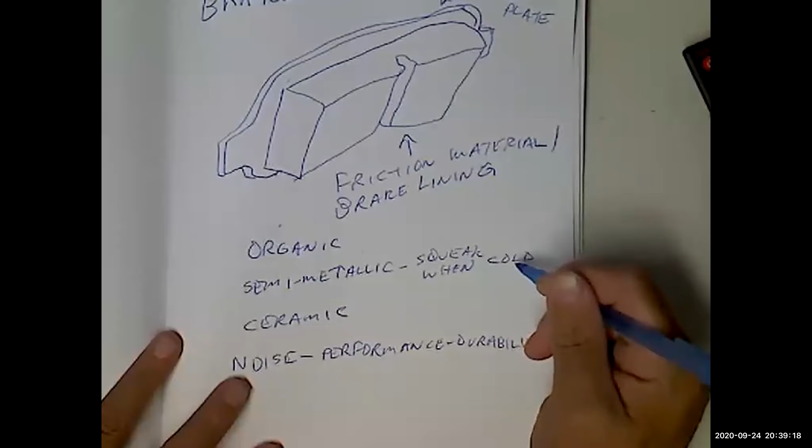If, however, they squeak on a 20-minute trip, there's no way they're not warmed up already, so it's being caused by something else. All right, semi-metallic used to be the state of the art for the longest time.

Now what's become very popular is ceramic brake pads. Last time I said this I got an argument from my good friend Rudy, but I love him still. Don't run ceramics on a solid rotor. Don't use ceramics on solid rotors. What do we think about that, Chuck?

Or do we? There's a lot of different trains of thought. Some people say the ceramic leaves a coating on the rotor and decreases the stopping power. I've never had that problem. Me neither. Of course, when I put them in, I put the friction material towards the rotor, so that helps a lot.

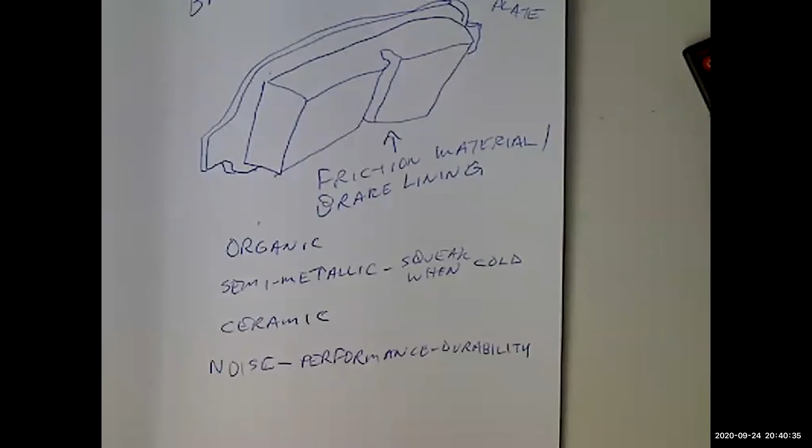Actually, there's a true story about that. I went to a shop to get a custom seat for my Z06, and it turned out they'd hired one of my real idiot ex-students. They asked how this guy did in class, and I said... because I didn't want to say he was an idiot who never did any work. Anyway, it turns out that when he was doing a brake job, he actually put the backing plates against the rotors instead of the friction material. They were less than impressed by that, because it was a BMW shop. Well, that's what you get for hiring substandard employees.

Anyway, my point was ceramic is the belle of the ball. Everybody loves ceramic now. They do have a suggested break-in period, so you might want to watch YouTube and see what you can discern from that. That's my new word for the evening. I get paid a dollar every time I use it.

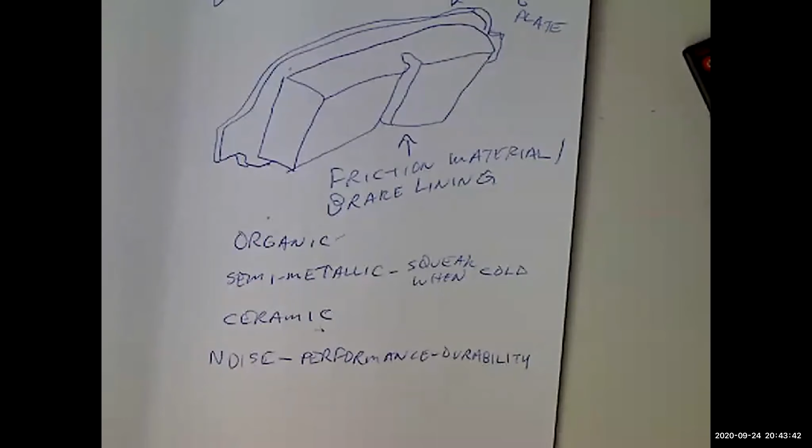So what I think you should do is wait until class opens. Can you wait that long? Because that's really what makes it easy to judge whether you should get rid of this, keep that, or fix this. I've got to tell you, most of the professional mechanics I know don't even cut rotors anymore. Now they just replace them, because the shop labor rate was $135 an hour, and it takes 15 minutes to cut a rotor, but you can get a new rotor for less than that.

And then you have to worry about whether it's going to cut clean on the first pass, or whether it's going to get too thin. So most of the places I know just put on new rotors. But I don't know your financial situation and stuff like that. As for calipers, I'm not going to replace them unless they're bad, because that's an endless pit. You can replace stuff just for general principles and it won't get you any further down the road. Then when it's time to replace something that actually needs replacing, you won't have the money because you replaced a bunch of calipers that didn't need it.

Okay, so how do we check calipers? We check to see if they leak, right? Yes, Chuck, what up? What type of car is it? That dictates a lot, whether you're going to need brake sensors too. F-250, what year? 05. Nah, it should be fine. How many miles? 89,000. Oh, no way, they're hardly broken in.

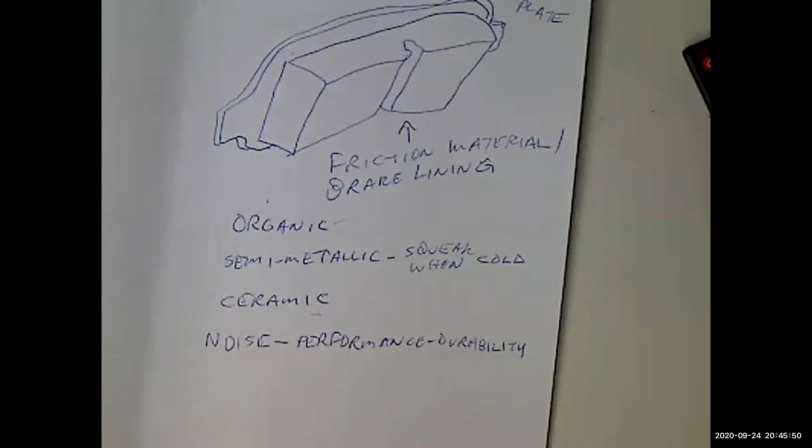My question is about the rotors visually. Can you see them through the wheel? Yes. Do they have any waves on them? Yes, wavy rotors. Just asking, what do you mean waves?

Sometimes you can see a rotor and you can see it's wavy. You can actually put your finger across it when it's cold. You can see like grooves in it. Not so bad that it's metal to metal, but you will see actual waves on the rotor from heat and wear.

I'm just asking if that rotor was wavy, you know, glazing is bad. It's time to replace the rotor, or are you going to cut them, turn them, one of the two.

I've had lots of cars where I never cut the rotors in 150,000 miles, so I just put new pads on it. It didn't bother me. It's not professional, and Chuck doesn't like it, and Rudy doesn't like it, but I liked it. So we're talking cost, and what's your tolerance of how good you want it to be.

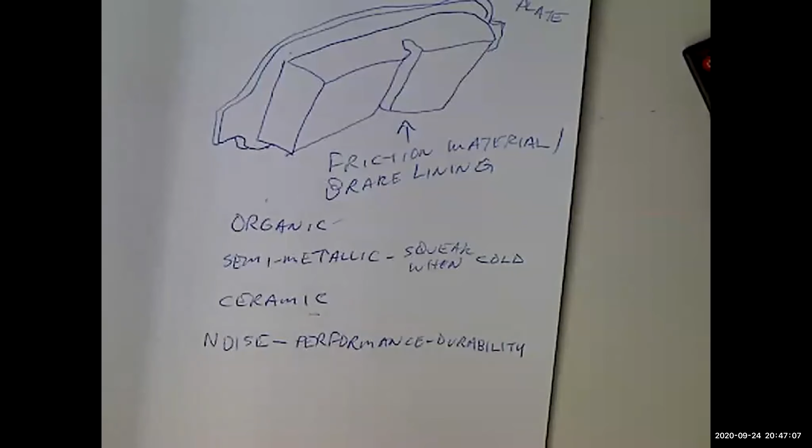I just like being safe because I drive so fast. I know, but the more you cut the rotors, the thinner they get, and then you have to cut both rotors the same thickness. The thinner they get, that means the less heat they're able to absorb and get rid of. So it's a double-edged sword on that. That's why I replace mine every fourth brake job.

Man, that's a heavy foot. Yeah, seriously, huh? Anyway, my point is, I don't think I've done 4 brake jobs in 200,000 miles, but then again I drive a sports car. So the point I was trying to make was, you guys get my red Corvette back together yet? That's what I'm excited about.

Have we been able to get in the garage to put it back together yet? No, supposedly they just put in the epoxy floor, so we are going to have the opportunity to completely reorganize it the way we want it. That I think is going to be interesting. Yay!

The point I was trying to make was, Dave, we can cut those rotors at school when we get back in, or you can just take them down to AutoZone and they can cut them for $7 if that matters to you, if you have a second vehicle too. Then Rudy will admire you, so you know what that's worth.

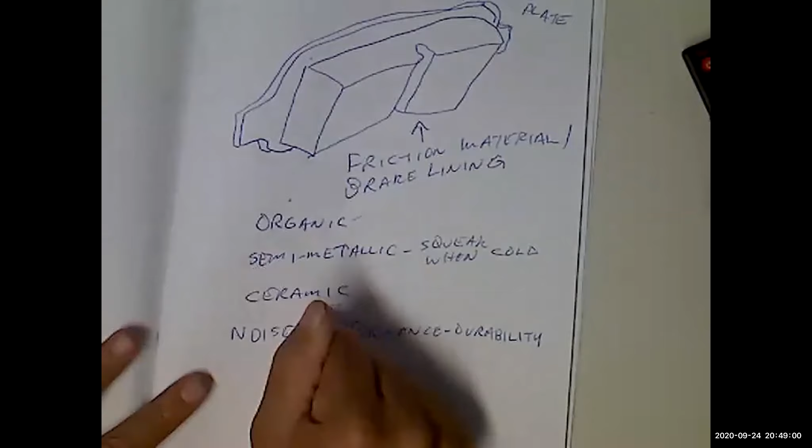Okay, so ceramic's the best stuff. You're probably going to pay $20 a set for these, probably $30 a set for these, and $40 a set for that, or maybe 35 and 45, whatever. It doesn't matter. Just get the good stuff, because you will not be sad, and it'll make your brake jobs last a long time.

This is especially true if you're doing the work for someone else, because if you use cheap materials for someone else, when it needs to be redone in 6 months, they're going to blame you. They'll say everyone else doesn't need their brakes done after 6 months, it's your fault for not talking me out of it. That's human nature. So as far as brake materials go, use the best brake materials you can from CarQuest, because the expensive part of a brake job is not the parts, it's the labor. That's going to give you the best of all worlds here.

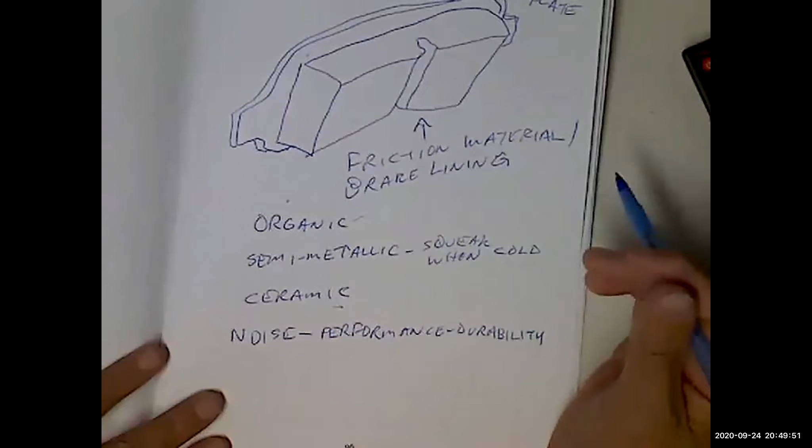So when you take your brakes to get done, do they offer you these three options?

It depends. Sometimes they will, sometimes they won't. So they could be putting in anything, is what you're saying.

The problem is, Gabe, there's such a huge variation in the professionalism of shops. There's guys that have never gone to school, trained by grandpa fixing his tractor, who couldn't name the parts if you asked them. And then you've got Connie and Dick's that's going to put out a 16-page report, including movies, pictures, and meter readings. So it's everywhere in between.

There's people qualified to do diagnostics, and there's people who are not. People ask why I go to Connie and Dick's and Quality Auto. The reason is these guys are sharp enough on diagnostics that I'm not going to lose money by them misdiagnosing something. If you can't tell the difference between a bad power steering pump and a bad rack and pinion, you need to go to school.

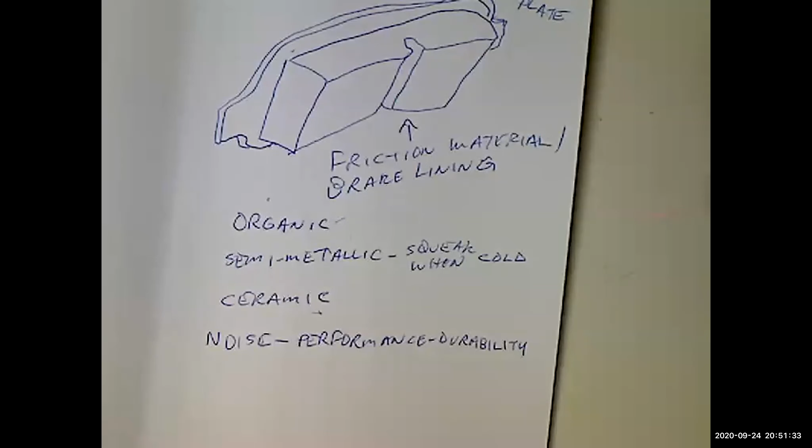I don't think that's acceptable. If I had a shop and a mechanic working for me who couldn't tell the difference between a power steering pump and a rack and pinion, I'd be kind of sad, and he'd probably be kind of unemployed. Is that fair? I think it is. Surely we're not supposed to replace a $600 power steering pump on a guess, right?

Quality Auto Service on Falcon and Pomona, and Connie and Dick's in Claremont, will probably charge more per hour than most shops, but their diagnostics are miles above everybody else, and you probably end up saving money.

And if you do have a problem, they're going to stand behind their work, and they're not going to quit returning your phone calls and hold your car for 3 or 4 weeks. These are righteous shops.

If we expect the righteous to prosper, then we have to give business to the righteous. Lo barato sale caro, right? That's true. That is so true.

This is definitely one of the main things I've always wanted to learn, how to do brakes. I'm asking because when you take it somewhere else, I'd imagine you'd want to specifically say, I want ceramic brake pads.

That's what you would want, like for example on my Ford Flex. Ford Flexes don't come with ceramic pads from the factory, they come with semi-metallics. Whenever I go in to have my brakes done, I tell everybody I'm running drilled and slotted rotors and I want ceramic pads, the best pads I can get, because I have a heavy foot.